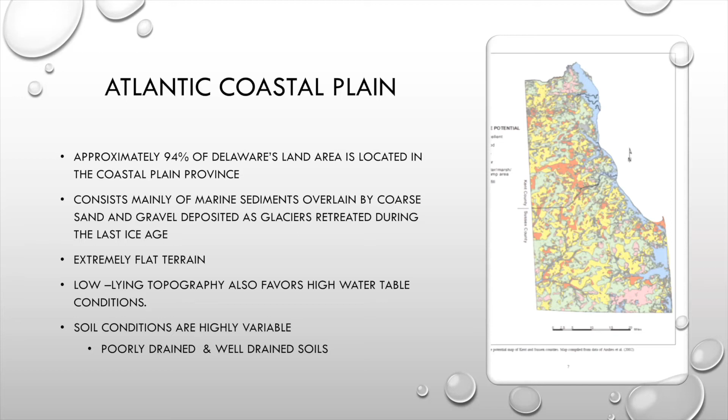Soil conditions are highly variable. So we have both poorly drained and well-drained soils. So coastal plain characteristics and challenges. As we talked about, we have variable soil types, obviously a flat topography, high water table. These all lead to drainage challenges.

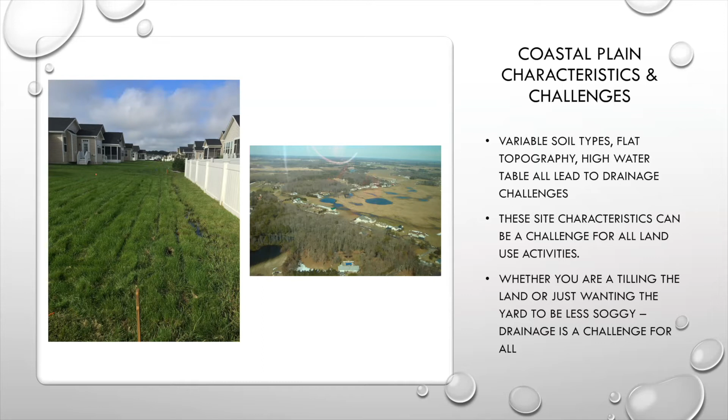So soil types affect drainage. We have very sandy soils, which is great for infiltration. As you can see, kind of the beachy sands. You'll find those soils in the Lewes and Rehoboth area. The Route 1 corridor is really our best area for infiltration. So we'll find really, really sandy soils and good separation from groundwater.

So some areas have these extremely high infiltration rates, and therefore drainage is not a challenge. In some cases, we have stormwater systems that are underground utilizing that excellent infiltration. The only challenge with having sandy soils is that they're highly susceptible to both wind and water erosion. As you can see in that one picture with a construction site, we'll have wind erosion because sands move very easily.

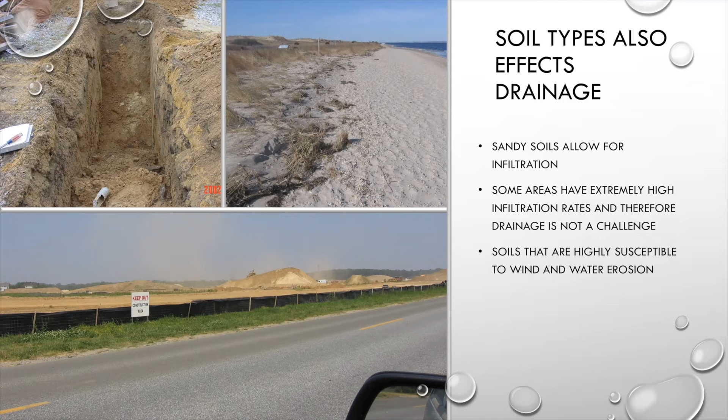So poorly drained soils, and I feel like this is what we talk about most in Sussex County. We have a lens of less permeable soil, which restricts infiltration and results in drainage challenges. So we have wet swale conditions, which I feel like we talk about on a regular basis, where we're always receiving calls from residents asking questions about how to maintain their swale or who to call because they have water sitting in the swale. So it's a very common drainage concern in residential communities.

It is a challenge to meet property owner expectations where there is irrigation, high water table, and flat topography. So in some cases, developers install concrete valley gutters or pipe storm drain in order to avoid grass swales. The downside is pipe systems provide less water quality.

As you can see in a couple of these pictures, and these are all pictures that I've taken from residential communities, we are basically changing the soils of a site, and they're being mass graded. We're bringing in equipment, we're bringing in fill, and so we're changing the permeability of those underlying soils. So we're compacting it and we're filling it. And then we're channelizing flows, and we're trying to convey that water typically to a stormwater pond for treatment.

So with all of that, and then if you add irrigation systems on top of it, it makes it very challenging to have a dry swale. At some times of the year, especially during the wet season, you're going to see groundwater sitting in some of these swales and ditches for a period of time. And it's very flat here, and it doesn't take very much to change the grade of a swale.

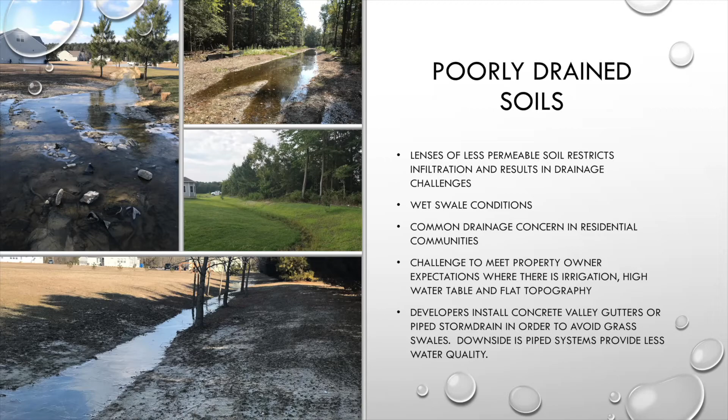So as I talked about, we have high groundwater. In coastal areas, we are just feet above sea level. You go to the Bethany and Millville area, sometimes you're only 18 inches above sea level in your yard. So the closer to the coast or inland bays and waterways, groundwater is closer to the surface. And groundwater is the highest outside the growing season.

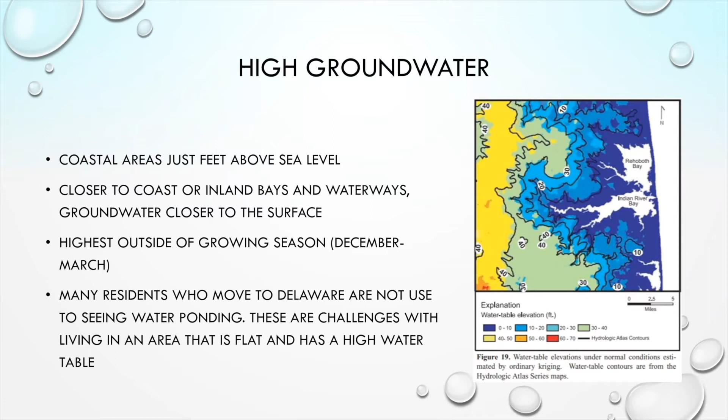So we hit peak groundwater between December and March. Typically at the end of February into early March, we'll hit peak groundwater, where you actually start to see water sitting in ditches or in areas that you don't typically see it throughout the rest of the year. Many residents who move to Delaware are not used to seeing water ponding. These are challenges with living in an area that is flat and has a high water table.

So historic water management. "Crooked streams are a menace to life and crops in the areas bordering their banks." This, from American Forests magazine from 1935, kind of gives you a glimpse of how drainage was viewed during that time frame. At this time, natural streams in Delaware's coastal plain were starting to be channelized to improve drainage efficiency, and the intent was so that we could farm the land, which was a livelihood forever, and continues to be a livelihood.

And so we'll see that these ditches were put in the farm fields to bring the water table down so that they could farm the land and access it. So just this one last quote I always found interesting: the twisting and turning of the channel retards the flow. Floods result, crops are ruined, lives are lost. So putting these ditches in changed the way farmers were able to use the land and changed production.

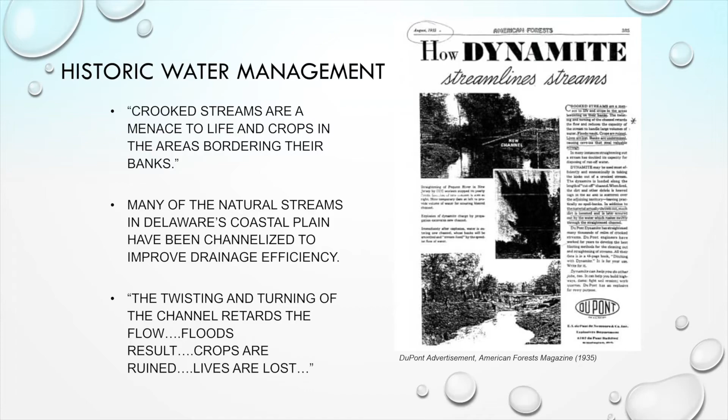So flat topography. Areas have been ditched in order to lower groundwater so that the land can be farmed or developed. So many of these ditches that were originally just intended for agriculture have now been used for stormwater outlets. So we still today rely on these ditch systems to drain our neighborhoods. So in Delaware, you are never very far from water when land is developed. So the potential for impacts to ecosystems and natural areas is significant.

So historic water management. The Delaware tax ditch law was passed in 1951 to establish a process to manage and maintain the ditch system by the affected landowners. Tax ditch watersheds range in size from the 2-acre Alban Park tax ditch in New Castle County to the 56,000-acre Marshyhope Creek tax ditch. The tax ditch system consists of over 2,000 miles of ditches with a total drainage area of over 600 square miles, most of which drains to the Chesapeake Bay.

So tax ditches can range from being only 2 feet wide to up to 80 feet wide. They can be 2 feet deep to 14 feet deep. So we do have a variety of tax ditches that provide drainage throughout the state. So there's over 230 organizations in the state that manage 2,000 plus miles of ditch channels. So the county breakdown: in New Castle County, there's 26 tax ditches. Kent County has 78. And Sussex County, not surprising, has 137. And so they were formed through the Superior Court.

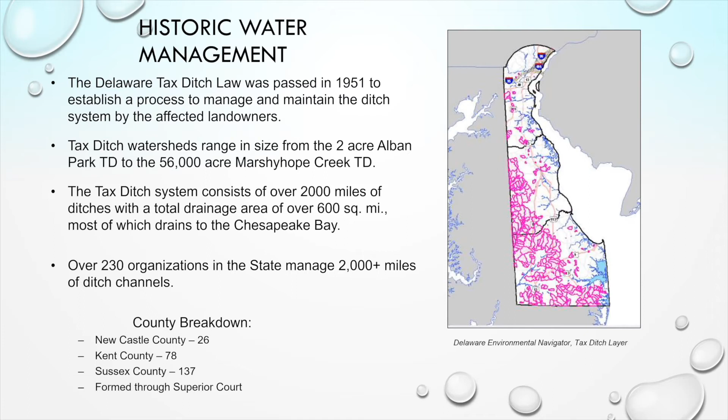But one thing that doesn't change is that they provide drainage for a watershed. And those people pay a tax and they rely on that system to function so that they have adequate drainage. So tax ditches are organizations formed on a watershed basis to construct and maintain a drainage system. The organizations are managed by officers who are elected by the taxables. So they have a tax ditch manager, a secretary, a treasurer, and they oversee the maintenance and operation of that system, and they meet to discuss what work is needed to make sure that it functions as intended.

So the law declared that the drainage and the prevention of flooding of lands and the management of water for resource conservation shall be considered a public benefit and conducive to the public health, safety, and welfare. And that's so important that these systems are in place and that they're routinely maintained, because they have become so important to farmers, to neighborhoods, to even our roadways that also drain to them.

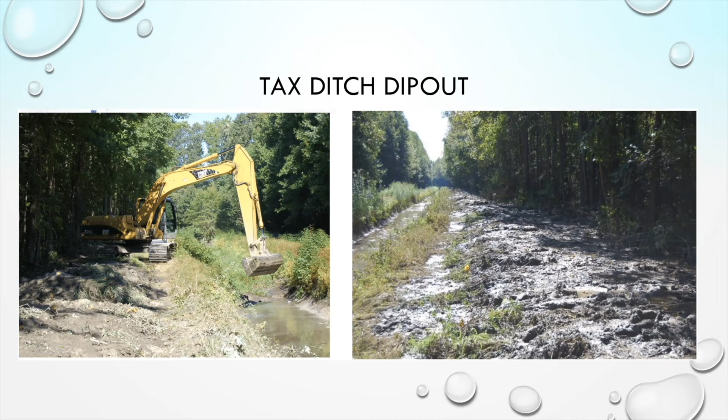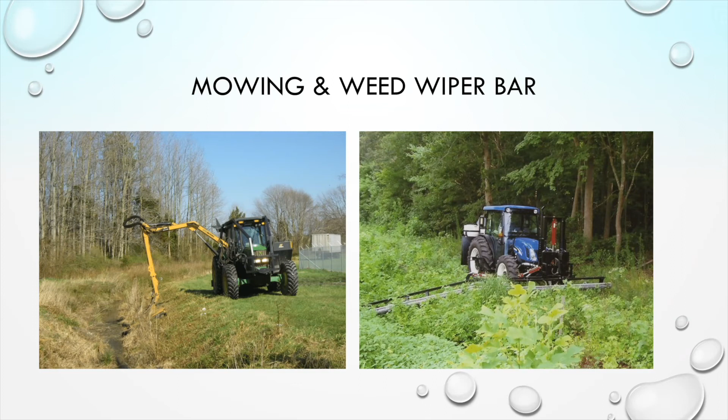So DNREC drainage section provides technical assistance to tax ditches. So they provide both federal and DNREC permitting assistance. They provide assistance on the tax ditch dipouts. They work with the different tax ditch organizations and the managers, making sure that they're meeting and providing technical assistance as needed.

They also assist when there's culvert pipe installation in tax ditches, any kind of bank stabilization or erosion issues that need to be addressed. They also provide assistance for invasive species management. They provide tax ditch managers with the documents that are needed for just standard business operation.

So open access tax ditch map. So there is a tax ditch map. So if you're curious if the ditch in your neighborhood or on your property is a tax ditch, you can easily find this information out by going to this website. It is very user-friendly. It only requires that you put your street address or tax map and parcel number in, and it will take you to your property.

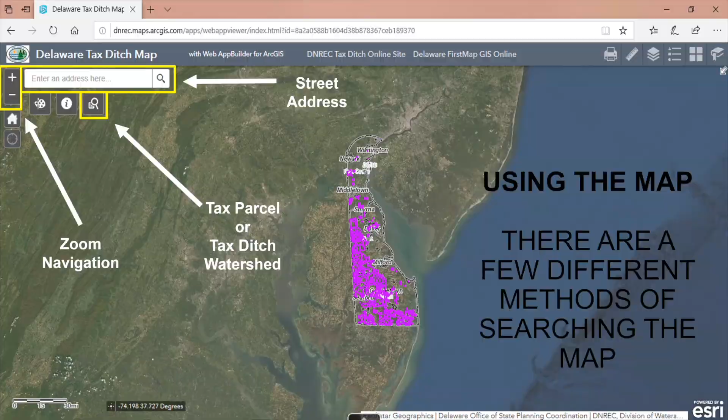And then you can click the different layers to determine if there is a tax ditch there, if you're in a tax ditch watershed, and then where the right-of-way is associated with that tax ditch. So interesting enough, not all ditches are tax ditches. So we get lots of calls from property owners saying to us, hey, this tax ditch on my property is not working, or the tax ditch in my neighborhood, somebody needs to come out and maintain it.

So in a lot of cases, we'll find out that the ditch that they're referring to is not a tax ditch. So we have used ditches historically to drain farmland, and not all of those are tax ditches. So they're not located in an easement. There's no designated right-of-way for maintenance or access. They're not regularly maintained, but they are still used as an outlet for stormwater facilities. They can be clogged and are obstructed.

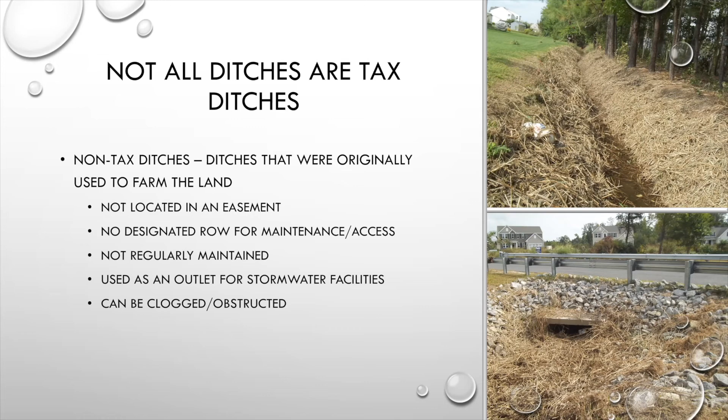So the challenge with these non-tax ditches is that you have to obtain permission from downstream property owners to access it if there is some type of blockage. So it can be a challenge maintaining drainage and continued function in non-tax ditches. So blocked drainage conveyances. With a high groundwater table and very little topographic relief, it does not take much to block drainage. And we have found this all too often.

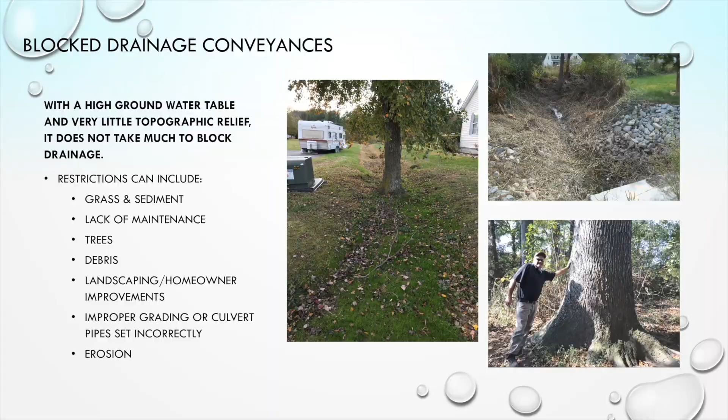So preventive and routine maintenance. So inspect ditches regularly and before and after large storm events. So I always tell people during hurricane season, really look at your ditch, look at your stormwater and look at your ditch where it's outfalling to, and see if there's any blockages, what maintenance is needed to go ahead and get that ordered through a maintenance company and scheduled, and see if they can make sure that any kind of pipe crossings, box culverts, everything is free and open and allows that water to flow through.

Get those Christmas trees that have been dumped into that ditch out. Try to make sure that that system can function as adequately as possible if we do get a significant storm event, and then monitor for erosion and washouts.

And just as important as it is to look at that ditch before a storm event, it's equally important to walk it after, especially a significant storm event, and see, did I have washouts? Did a tree fall in the channel? What do I need to address for the next rain event?

And the other thing that we always stress to people is properly dispose of landscape and vegetation. And this is just an education and outreach challenge with every community HOA. You cannot police what every neighbor is doing, but just encourage them not to put those grass clippings and compost in the ditch itself.

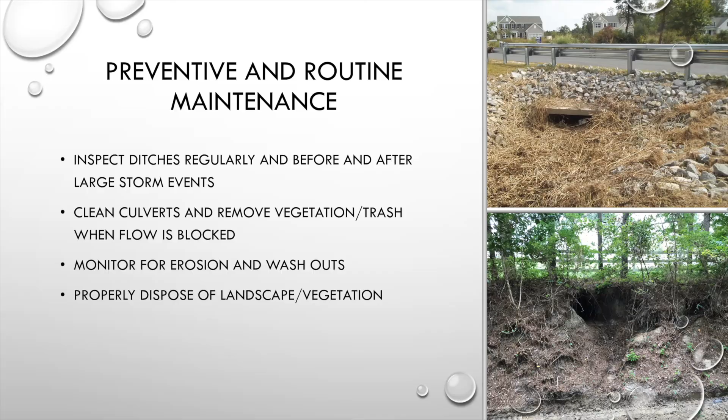So roadside and rear swale conveyance. Drainage is already a challenge, and then we add irrigation, compacted filled soils, impervious cover, and mowers. As I said earlier, we're changing soils in neighborhoods. We're grading them, we're filling them, we're channelizing flows, and then we're putting irrigation systems on these elevated yards that are compacted, and we're funneling it and directing it all to these swales. And we're expecting that swale to be dry. And this is a challenge.

You may be doing your job as a property owner and managing your irrigation system as appropriately as possible, but your neighbor thinks that more is better and he waters more frequently, which is creating a challenge for you. So there's nothing that we can do on some of these issues but to educate people as much as possible on proper irrigation systems and not overwatering, and then when to mow. All of these play a factor in how that drainage system is going to work and function long term.

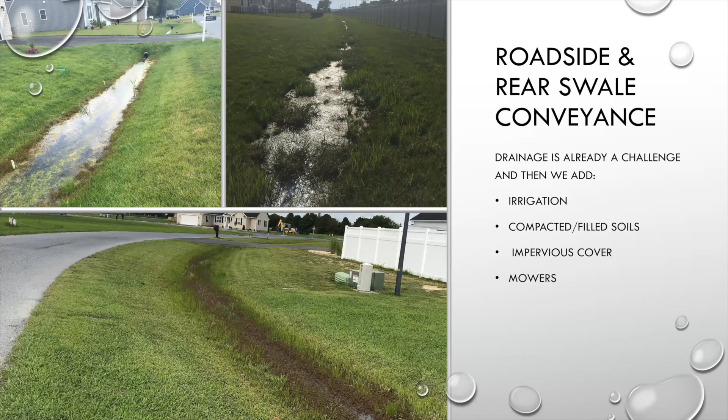Another issue that we see, especially during the wet season, between December to March when we hit peak groundwater, we receive a lot of calls on sump pumps and how to discharge. This is something that is not regulated in Sussex County. We see sump pumps used for crawl spaces, and if somebody has a basement, we'll see up to three sump pumps.

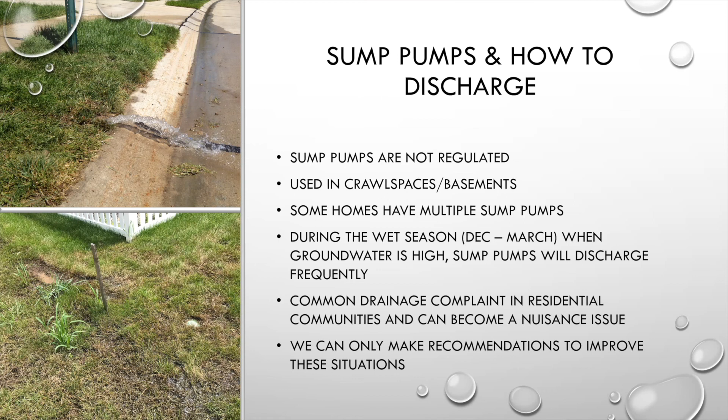During the wet season, as groundwater starts to increase and we peak elevation in late February, early March, we will see sump pumps running all the time. They will run every couple of minutes. And where does that water go? It's either going to your backyard or it's going to the roadside swale in front of the house. This is a common drainage complaint in residential communities. It can become a nuisance issue, but not something that we regulate, so the only thing that we can do is make recommendations in these situations.

So how are widespread drainage issues addressed? In Sussex County, we have agency collaboration. DNREC drainage section will provide technical assistance to tax ditch organizations, and any drainage complaints where the community is older than 1991, meaning they do not have a sediment and stormwater plan, are directed to DNREC drainage section for technical assistance. Any drainage issues pertaining to DelDOT, so maintenance issues in road right-of-ways or flooding on roads, get sent to DelDOT for assistance.

Any kind of drainage concerns pertaining to roadside swales in residential communities are directed to Sussex County Public Works for technical assistance. And any kind of stormwater issues, we provide technical assistance. We also provide technical assistance on rear and side swale issues.

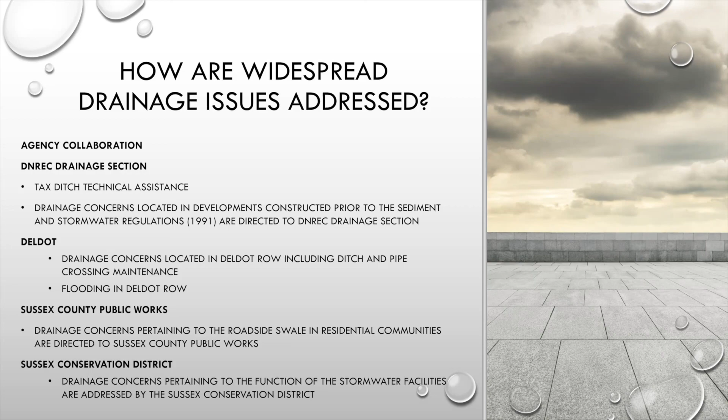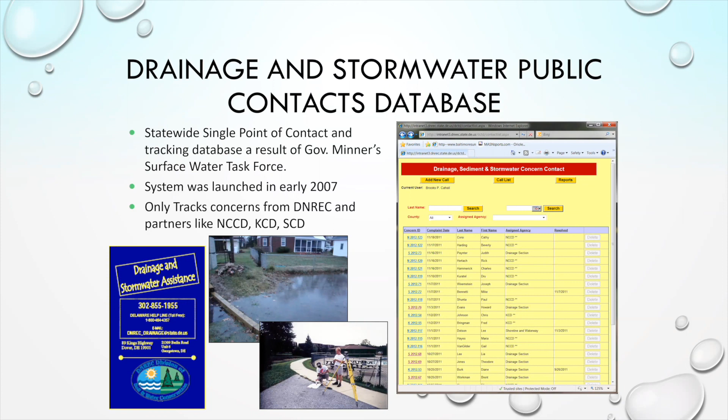Drainage and stormwater public contacts database. This is a statewide single point of contact and tracking database as a result of Governor Minner's Surface Water Task Force. It was launched in early 2007 and only tracks concerns from DNREC and partners like New Castle Conservation District, Kent Conservation District, and the Sussex Conservation District. If you call the Drainage and Stormwater Assistance Hotline at 302-855-1955, your drainage concern will get logged into a database and then directed to the appropriate department for technical assistance.

So there are technical resources available. For DNREC drainage section, if you have questions or concerns pertaining to tax ditches, please call our office. Any stormwater issues or concerns with rear and side yard swale issues, you're welcome to contact the Sussex Conservation District for technical assistance. There are homeowner and HOA fact sheets available on our district website that are very helpful.

We did recently develop the swale fact sheet, which is something that we recommend homeowners pass out to the residents in their neighborhood. It explains how a swale works, how to maintain it, the do's and don'ts.